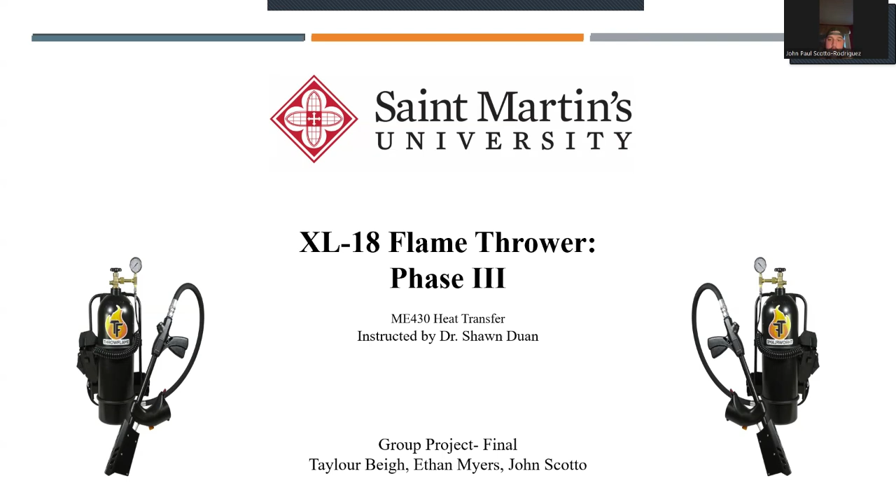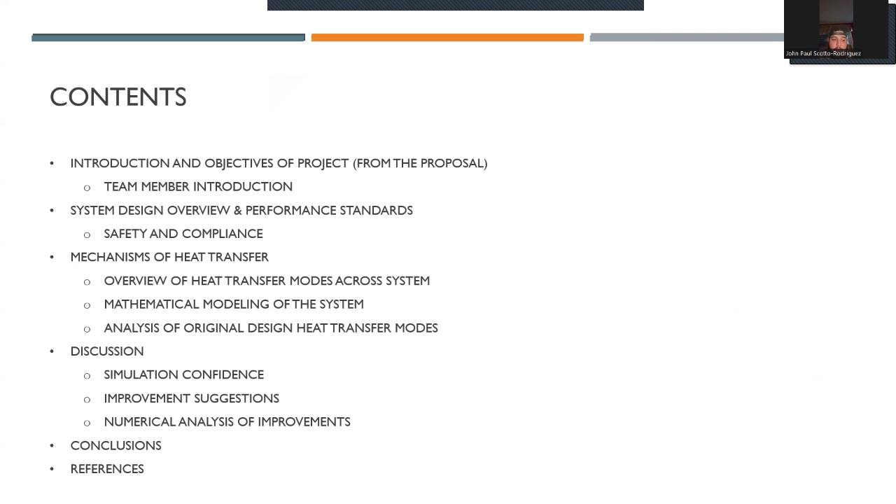The contents we're going to be going over: introduction and objectives of project from the proposal, team member introduction, system design overview and performance standards, safety and compliance, mechanisms of heat transfer, overview of heat transfer mode across system, mathematical modeling of the system, analysis of original design heat transfer modes, discussion, simulation confidence, improvement suggestions, numerical analysis of improvements, and the conclusion and references.

The XL-18 flamethrower exemplifies cutting-edge engineering principles in heat transfer, demonstrating interplay of conduction, convection, and radiation. While originally designed as a weapon, modern flamethrowers have diversified applications in agriculture, firefighting, pest control, and emergency operations. The flamethrower's ability to deliver concentrated, rapid heat makes it a valuable tool in specific situations where conventional methods are impractical.

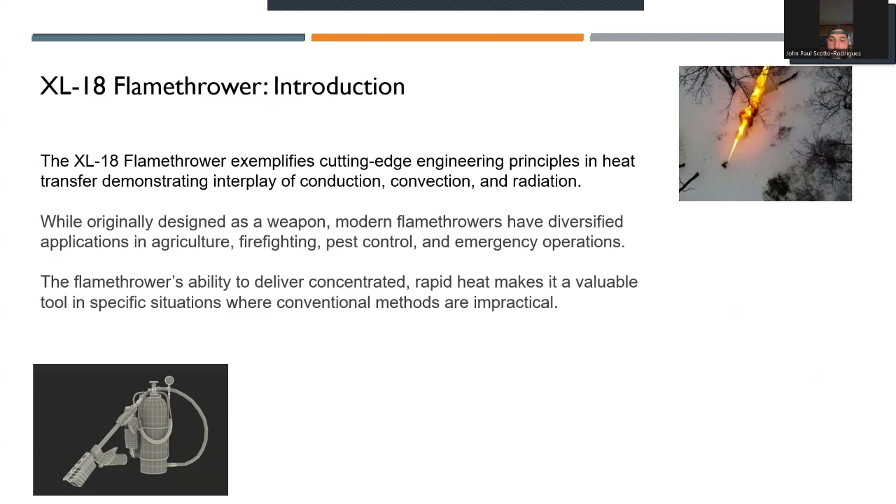Moving on to the system design overview and performance standards, the XL-18 flamethrower operates using a high pressure CO2 system to eject flammable fuel and maintain consistent combustion. Included here is a table showing some design specifications, such as the effective range, fuel capacity, and CO2 tank capacity. Some of the key specs is the effective range of 110 feet.

The system is compatible with multiple different types of fuel, such as diesel, gasoline, or napalm, or a mix of that. And then also that there's a maximum continuous fire of only 6 to 7 seconds, given that we have a fuel rate of roughly half a gallon a second, and that we only have a fuel capacity of about 3 gallons.

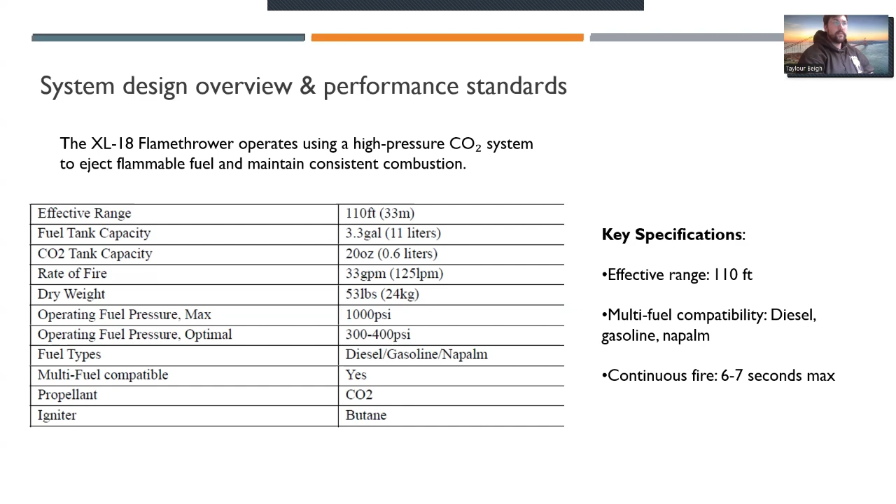Moving on to the safety and compliance. The components are all going to have to meet some type of criteria to make sure they're safe. An example of these criteria is the tanks, the fuel holding tanks. They're subject to adhere to UL142 and UL2085. These specifications set standards for the materials, the compositions, essentially the metallic or the mechanical principles to make sure that they're able to uphold and stay structurally sound over time and endure the abuse.

There's a few redundant safety features incorporated in the system. One of them is the fact that we're using CO2. CO2 is kind of the pusher; we have 2 tanks in the system. The CO2 pushes the gasoline or napalm or diesel, whatever mix you have, out. And since CO2 is expanding and it's filling in that tank, there's no chance for backfire because there's no chance for combustion to happen if there's no oxygen. If CO2 is in the place, combustion can't happen.

In addition to this, because it is a human mounted system and it's made to be carried by a person, we're limited by what a typical person is going to be able to carry and realistically what they would want to use. So the system already weighs 53 pounds dry. Gasoline, which is the lightest of the fuels that we mentioned, weighs roughly 6 pounds a gallon. So with just over a 3-gallon capacity, that's about a 70-pound system when it's all filled and all said and done. So you're limited just by the sheer fact of how much you carry, which is a bit of a safety benefit anyways.

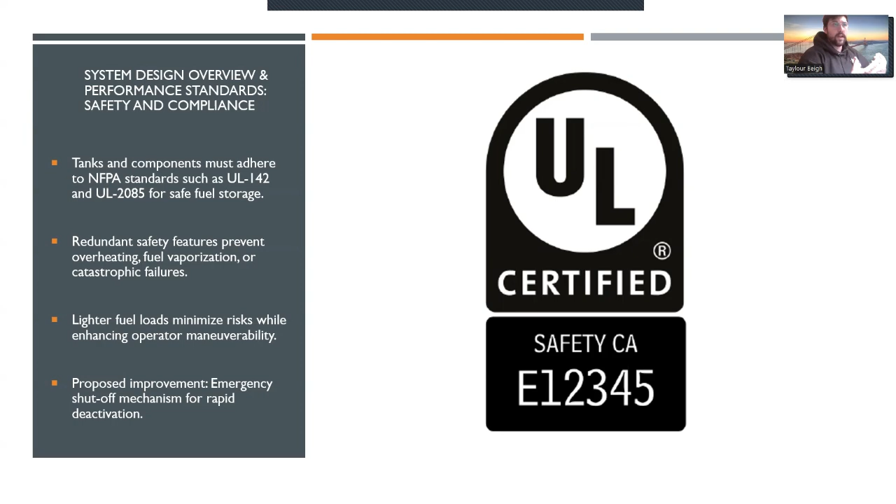For the mechanisms of heat transfer, the system uses all three primary modes of heat transfer: conduction, convection, and radiation. Conduction occurs in two different spots of the system, the first being at the fuel tank, the fuel interface, and the second being condensation occurring. For convection, convection dominates this whole system. Essentially, forced convection, really, because we have compressed CO2, it's what drives the flame out of the wand or nozzle. And then radiation. Radiation allows heat to transfer over distances, making the system effective even without direct flame contact.

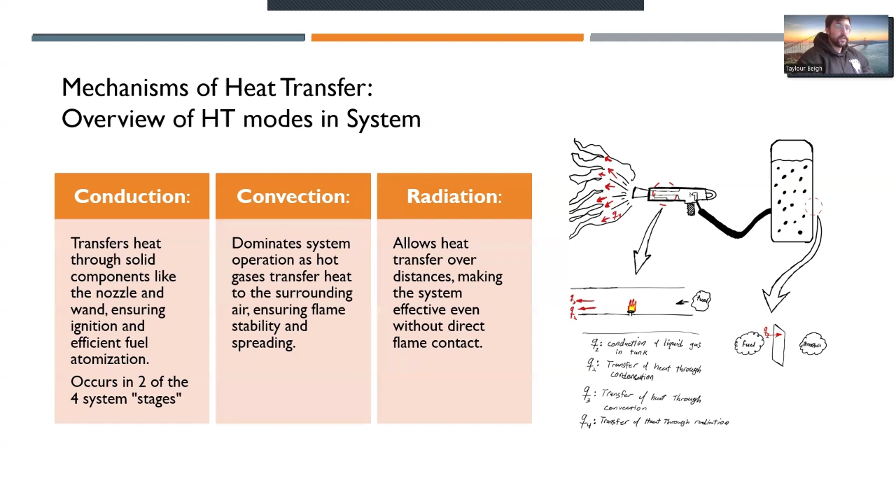And we can see this picture here shows the four main methods of heat transfer. Or I'm sorry, the three main modes of heat transfer, but it shows where they happen in the four different places. Now, modeling the system, we can rely on the three primary heat transfer rates, which are given through our textbook.

For conduction, that relies on Fourier's law, which states that it's the thermal conductivity times the difference in temperatures over the distance. Similarly, for convection, we can use Newton's law of cooling, which states that it's h, a coefficient of convection heat transfer, multiplied by the difference of the temperatures. For radiation, we use the Stefan-Boltzmann law, which states in a similar concept to the convection, we have an emissivity, a Stefan-Boltzmann constant, and then we have the difference of the two temperatures. However, both of those are being raised to the fourth power.

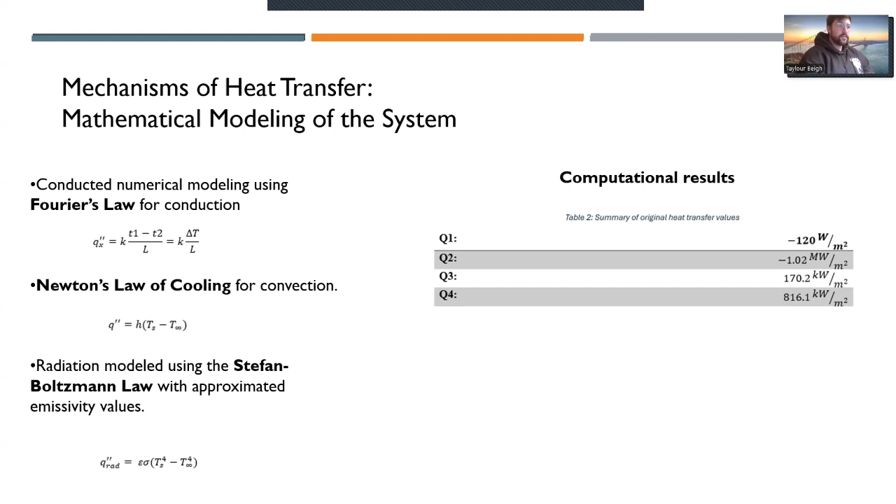Moving on to the computational results, we have the four different stages of the system and their values, respectively. So we took an energy in, energy out approach. We knew how warm the outside was. We assumed there was no wind. We assumed that the flamethrower had been sitting outside for a while, and thus the fuel inside and the walls of the container and the nozzle and everything was the same temperature, which was the outside temperature.

We knew how warm it was outside. We knew how warm it was inside the flamethrower. And we also knew how hot the torch got, the pilot torch that starts the flamethrower. And we also knew the potential chemical energy of the fuel, and we also knew the potential energy of the CO2 canister.

And just a little reminder, the way the flamethrower works is you got a CO2 canister right here. I'm trying to get this in the view right here. And then that pushes gas, it goes up, and then it goes into a bigger tank full of the fuel, and it pushes the fuel out like this into the nozzle. And right before the nozzle there's a little pilot torch, goes over it, ignites, and then mixes with air, and out comes flame.

So limiting our calculations to the content of this class, we only use the three main types of heat transfer, which is conduction, convection, and radiation. So a little reminder, conduction is surface to surface heat transfer. Radiation is just energy across space, like radio waves and things. And then last one is convection, which is a fluid against a surface.

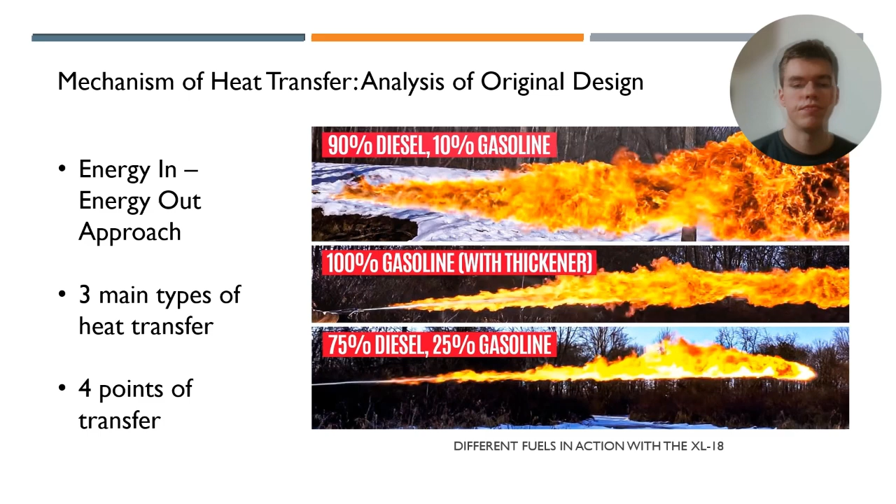Okay, so we did all of our more advanced calculations in ANSYS Fluent. Now, ANSYS Fluent is very expensive if you get the full version. The student version is very capable, however, there are a few things that it does not do, and those just happen to be the things that a flamethrower does. Such as ignition. Very difficult to model, very computationally complex, lots of resources that our team does not have the availability of, nor the ANSYS Fluent version to use.

So we took a very dumbed down approach. Made a lot of assumptions. Firstly, we did a 2D model instead of a 3D one. There'll be a picture of that in the next slide.

That really simplified calculations. However, we also lost out on the potential for the nozzle to induce any 3D gyration to create more of an atomization effect. So imagine rotating the fuel as it's going through to get some more velocity and therefore more air in there. We also assumed that the nozzle didn't do anything else like change the total energy by sucking air in, which it probably did by a Venturi effect.

We also assumed that the CO2 canister wasn't losing pressure while it was going. As it's pushing out the fuel, it will lose some of its pressure while it's doing that. The CO2 canister, according to the manufacturer, will last a few full tanks, but it still is a noticeable amount. And because we couldn't find data on how many full tanks of fuel the CO2 canister will last, it was a 20-ounce CO2 canister, FYI, we just skipped over it and assumed it was just a constant pressure.

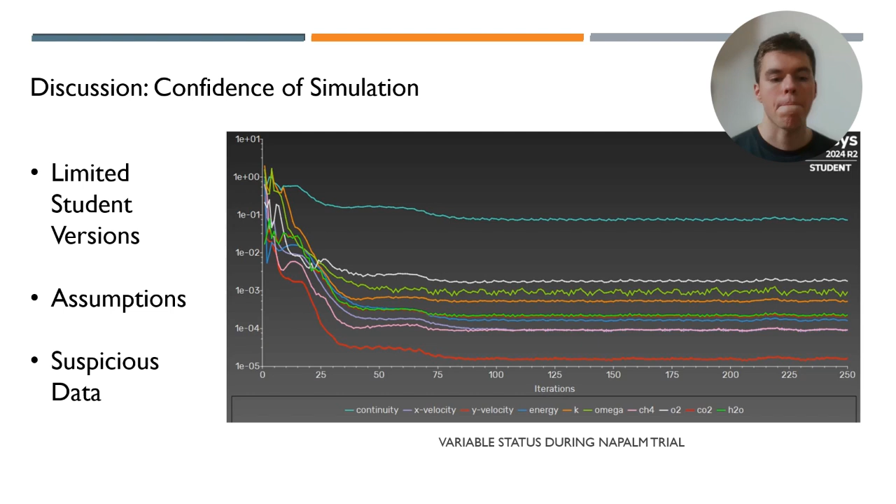Moving on. So from a purely heat transfer standpoint, there are a few improvements we could make to the flamethrower. Now, obviously, the point of a flamethrower is to transfer energy over a distance, but from the heat transfer perspective, we could chase the higher chemical temperature and therefore transfer more energy to the target faster, just assuming that there was no intended range of travel. So we removed the trade-off and we just assumed maybe the user is wearing a very protective suit and there's a big ice wall in front of them and he just wants to get in there.

So how can we do this? How can we get the flame hotter? Well, we could improve the atomization. So in the nozzle, rather than focusing on maybe a swirl effect or only igniting a certain amount of the flame but consistently so it doesn't go out, we could use something like a spray paint or automotive paint system. We could improve the atomization, therefore separating all the little fuel molecules, and then mix in air the best we can, so that all of the fuel has the proper amount of air it could want. So the stoichiometric ratio, and then it burns closer to its theoretical hottest temperature.

Now, that would increase the flame temperature, but another interesting thing to do is just increase the flame temperature directly. So maybe in an oddball situation, like you're in a factory or some other controlled environment, you could use electricity to heat up the flame also, and get it a lot closer to its ignition point before it actually needs to be ignited, which would make it a little bit more consistent. And you would be transferring, although a small amount of energy as compared to the chemical energy contained, a noticeable amount, and it would make the flame a little bit more consistent, especially in varying conditions, to have closer to ignition fuel.

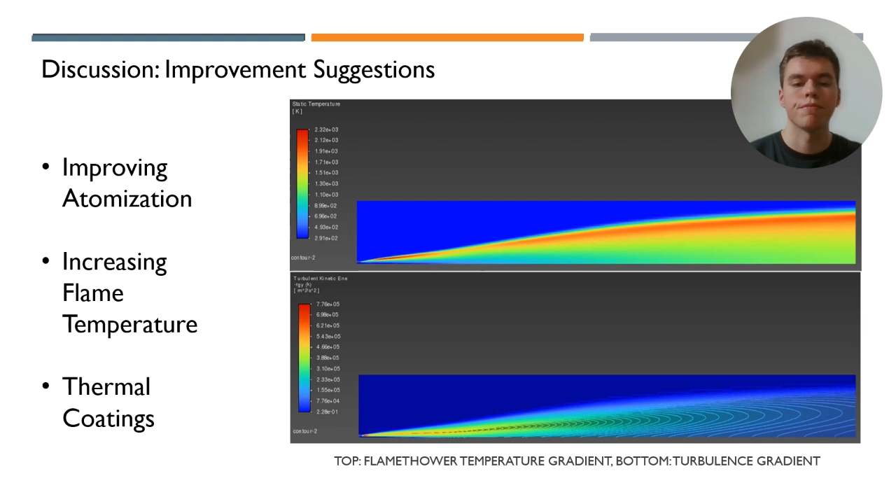So after this was all done, we took a little numerical analysis of some of our potential improvements. The one we focused on, the one we found the most interesting and achievable, was the preheated fuel idea. So let's say you increased the fuel temperature 50 Celsius or 50 Kelvin, which takes quite a lot of energy with a big tank of fuel. What would that do for it? Well, theoretically, I thought we'll get 50 degrees hotter. But in actuality, it was more like 7, 8. It didn't make a huge difference for the amount of energy that went into preheating the fuel.

And that's just due to the nature of combustion. That energy is not going to change how the fuel burns with air while it's in motion, how fast it can burn, and how it's competing with the pressure gaps caused by its neighboring fuel igniting. But it did make a difference. In our math, it didn't just get ruled out.

So this leads to some possible further numerical analysis. Firstly, we would like to try Fluent with a much more powerful computer and possibly a better version. Using our model, it would be as simple as clicking a few more buttons and it would run a bunch more equations. That would require a lot more computing power, especially if we go into the 3D realm. My simulations took about 30 seconds to a minute to run for each of the fuels. There was a little bit of fidgeting between the trials to make sure that it accounted for the different fuels. And we achieved stability, which was the endpoint of the simulation, when the changes in variables became marginal. So we would like to do that.

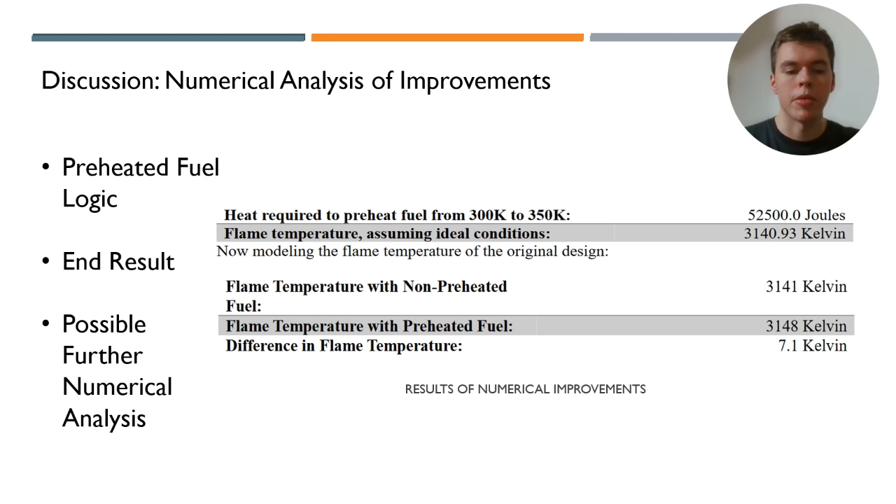Finally, it wouldn't be too difficult to put the thermal coatings on the flamethrower in our model and see what that would do. Like, how long would it take for the heat to soak through the steel pipe that makes the applicator? If we put some sort of ceramic coating on there, how long will it take before it burns someone?

In conclusion, the XL-18 remains highly effective for applications like movie special effects and agricultural/forestry controlled burns, while also showing potential for further optimization. The XL-18 flamethrower showcases the use of conduction, convection, and radiation in its heat transfer processes. Numerical modeling with MATLAB and ANSYS was used to analyze the system across 4 key stages of operation. Proposed design improvements such as fuel preheating demonstrated measurable enhancements, increasing the maximum burn temperature by over 7 Kelvin.